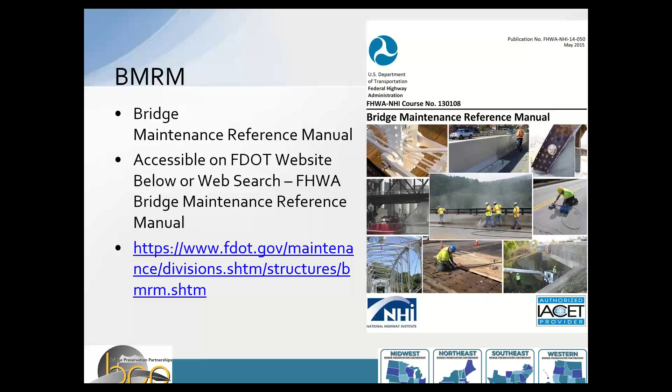So today we're talking about drift removal, and we're going to start off with what's the big deal with drift? How do I spot potential issues? We're going to talk about environmental and safety issues. We're going to talk about how to prioritize your drift removal, and then we're going to go into some best practices as well as proactive practices for removing your drift and sediment.

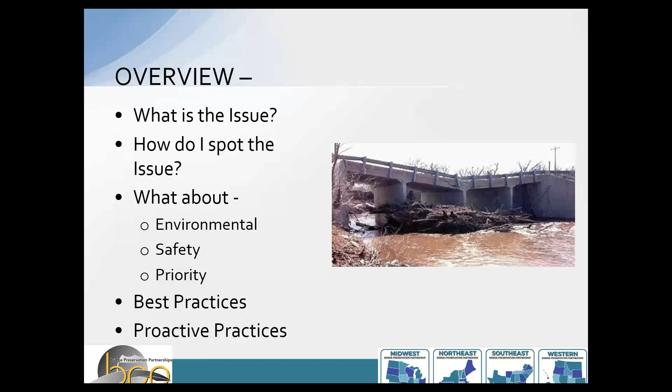So debris against a bridge can do several things to the stream and the bridge. Not only does it decrease the hydraulic capacity underneath the bridge, but it also increases velocity. That increased velocity of the stream increases the sediment transport, which increases the scour potential. As well as in some extreme cases, like in this view here, it could increase lateral pressure on the bridge that it may or may not have even been designed for.

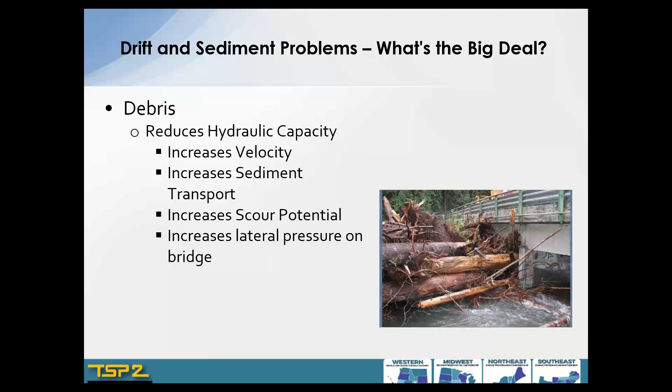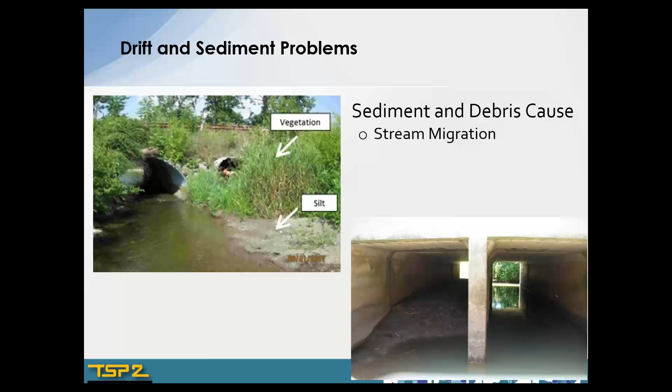Isn't it? There we go.

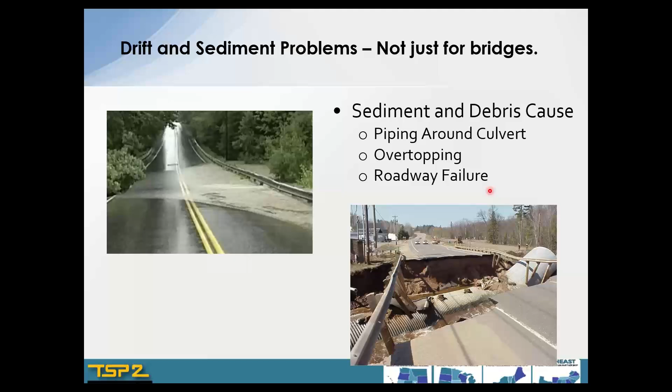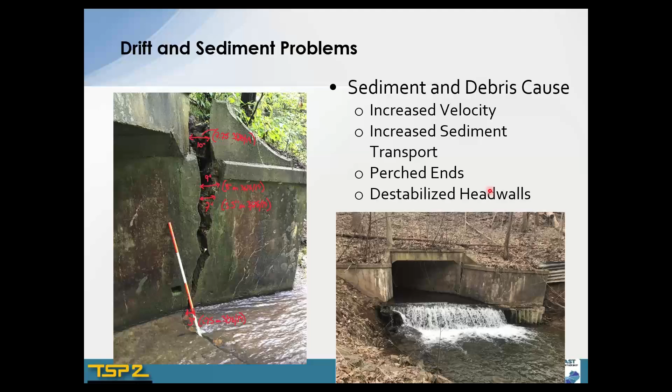Some problems are not so obvious. Sometimes if you're walking down a slope to look at the end of a culvert, you might see some holes in the slope. This isn't necessarily an animal hole. If it's directly over the culvert, stick a probe in there, see how deep it is. It's probably caused from some kind of ingress of soil from above into your culvert, where there might have been some settlement due to scouring issues that opened up seams and joints that the dirt can get through now, and you're starting to see that problem up on the slope.

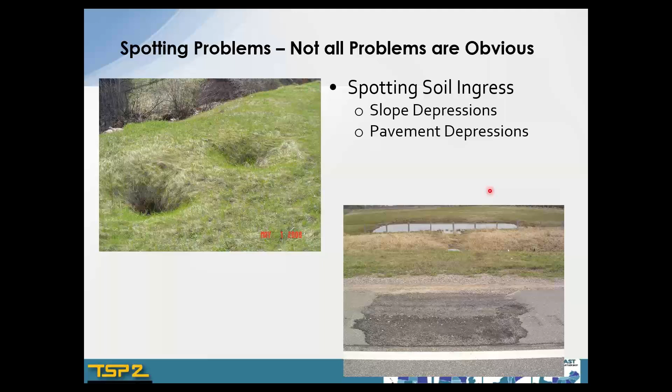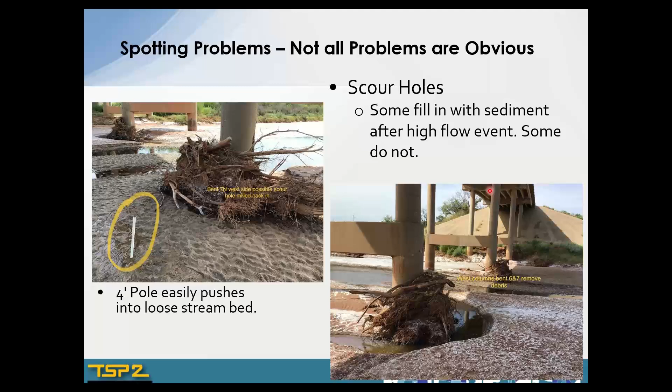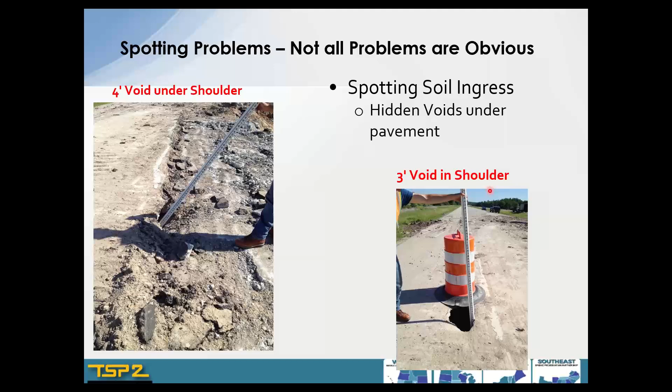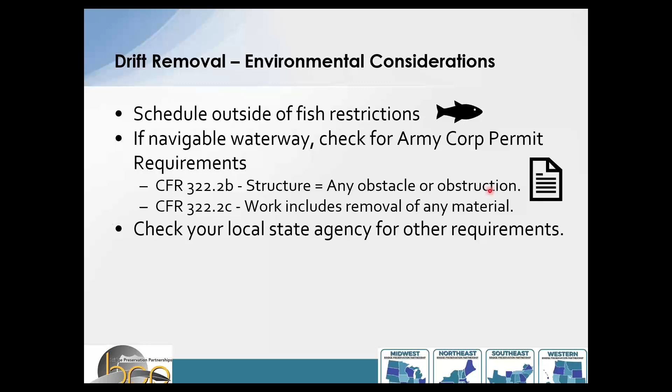If it's a navigable waterway you need to remove drift from, you're going to have to check with the Army Corps if they're going to require a permit to remove that drift. The language in the CFR is kind of very loose and ambiguous. They define a structure. The definition of structure includes any obstacle or obstruction, which drift qualifies for, and they define working in the water. That definition includes the removal of, and it just says any material. So obviously, Army Corps will need to be consulted on navigable waterways, but the biggest recommendation is always going to be to check your local state agency for other requirements.

So I looked into Michigan DEQ. They're very sensitive to fishing and fish habitats, and anything that could possibly disturb the river bottom. So if your drift is wedged into the river bottom, that's going to disturb the river bottom. And also drift makes great fish habitat. So you're going to need a permit for any removals in Michigan.

Oregon, I guess, has a removal fill law that says that more than 50 cubic yards of debris that's removed requires a permit, or if you're working in a salmon habitat. Looked at Kentucky. Kentucky has no permit needed to remove drift if you're following their best practice document, which has things like not disturbing too much of the banks, accessing responsibly, not driving equipment into the river, and so on and so forth.

Yeah, Jason, I'll just add on to that. In Oregon, it's highly encouraged from the environmental perspective to cut and float the drift down to your neighbor's bridge. I say that facetiously, but that really is what the desire is, to send it downstream and hope it doesn't get hung up on your next one. Yeah, I think one of the Kentucky best practices I looked at included cut and turn, which we'll have a slide on later.

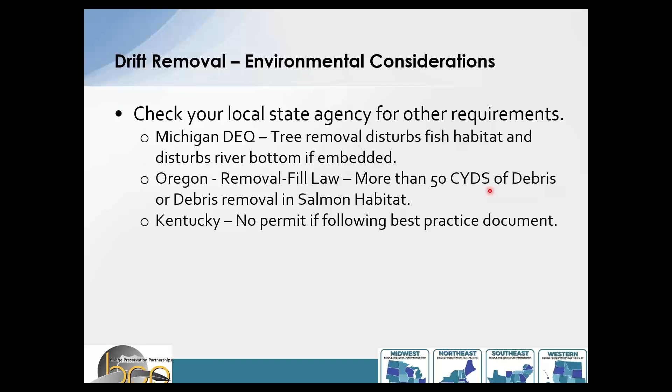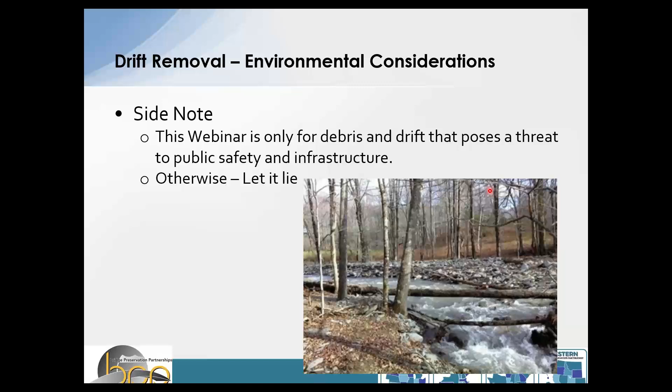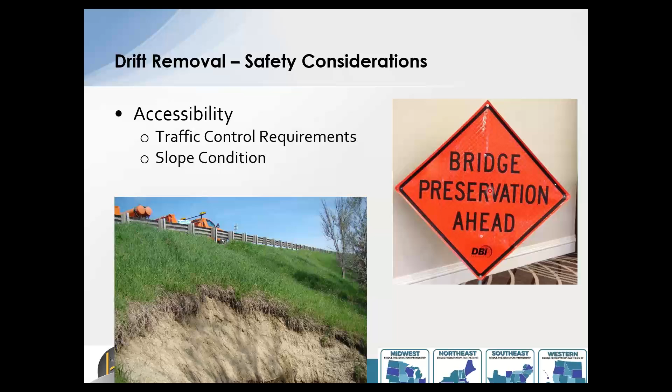Accessibility considerations: you're going to want to look at what your traffic control requirements are for the bridge or the culvert where you're doing this work. Is the traffic control going to have to be day or night? Let those things inform your decisions on what kind of safety requirements and safety equipment you need out there. If you need to go down the slope to access the drift, you're going to want to look at the condition of the slope, see if it actually is accessible, if there's an accessible point where you can get into the stream to the drift.

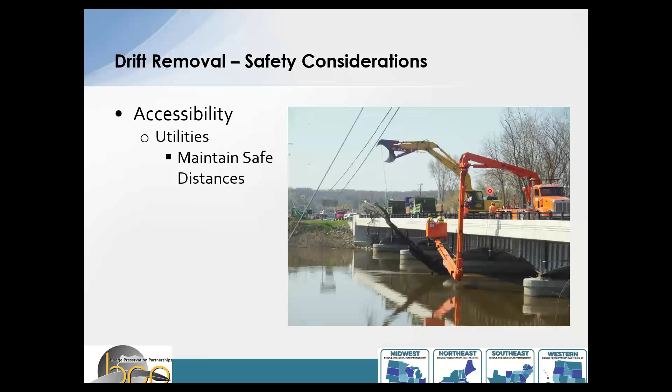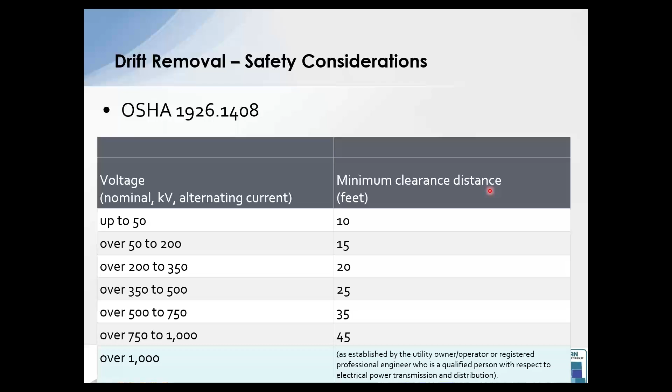So how do you decide which bridges you should look at first for drift removal? First, we're going to talk about, is your bridge scour critical or not? If it's not scour critical, it's not as high a priority. If it is scour critical, you should consider the removal of drift a high priority for yourself.

Everyone should have the scour criticality of their bridge flagged in the bridge file. It's metric number 18. It's required by the Federal Highway Administration to have your bridge evaluated for scour vulnerability. And if it is listed as scour critical, or if it's determined to be scour critical, you need to have a plan of action. Going to show some samples of what some of the plans of action look like from Michigan DOT and the information that we provide.

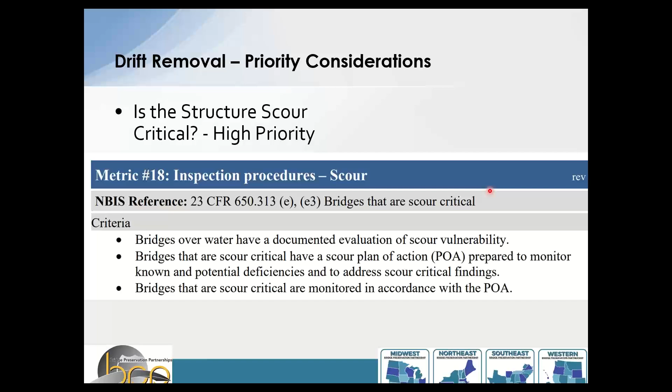So some of the information is helpful to also help with determining whether or not you should prioritize your drift removal. So you can see here, this bridge here, they have a scour analysis done for the 100-year and the 500-year flood, showing between 1.5 to 4 feet of freeboard, depending on the flood event that they had.

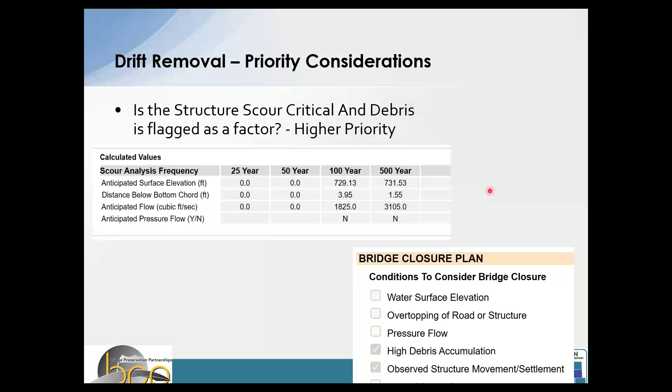There's also in the scour action plan, items to consider for bridge closure. So if you have high debris accumulation during a flood event, this bridge should be closed until the event is over. So if your bridge is flagged as having to be closed if there's high debris during a flood event, then you might want to make sure the debris piles are out of there before the high flood event. This is probably the higher priority in the inventory to make sure you get to for debris.

This bridge also experiences pressure flow, so it already has a hydraulic capacity issue flagged in the scour action plan. So it's very susceptible to scour under pressure flow, and high debris accumulation reduces that hydraulic opening, further worsening the scour issue. You can see here, even at the 50-year flood, this is flagged as having 0 freeboard. So that's not a very big flood recurrence.

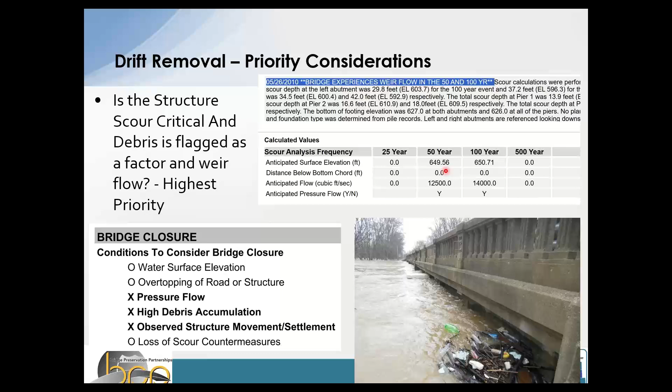Another highest priority, I would say, is if you have a scour critical bridge that has an existing foundation issue. Up here in the upper right, this is one of those sneaky scour holes that filled back in, but it projects well underneath the footing. In fact, some of the footing is even undermined. You can see the footing exposed here, and you can easily stick that range pole underneath the footing.

Over here, this is an issue on the bottom left here. I see a pile there, but guess what? A pile doesn't mean that it's scour stable. Some of these old timber piles were purely there for construction purposes without scour in mind. Additionally, in this situation, you can already see that there's soil coming out from underneath the abutment, and that can start to lose your approach. So if there's debris that starts piling up here, that's going to be a high concern.

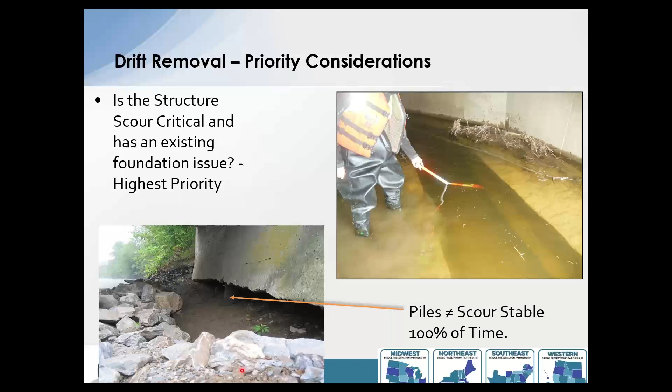So other considerations, the USGS has a lot of stream gauge monitors, and you can actually go in and look at your individual bridge location and see what projected flows are and historical flows and when the high flows are throughout the year, without having to do a lot of legwork going out in the field to monitor yourself.

So you can actually go to that USGS site for your stream, try to figure out the best time of year to remove debris for the lowest water depth and lowest velocity of the water at the time, because that's desirable when you're out doing debris work.

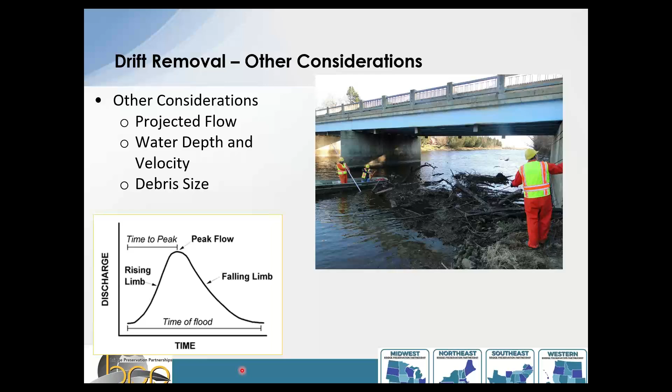So equipment. This is pulled from some of the best practices from that Kentucky document I was talking about. It says, do not drive heavy machinery into the stream. The goal for every state on every debris removal project would be to minimize your stream bottom disruption. You're also going to want to minimize the number of access points to the stream bank.

This Kentucky document recommends rubber tires on your equipment to reduce disturbance of soil over track-driven equipment, because the track-driven equipment obviously tears up more of the soil, and tearing up more of the soil on the adjacent stream banks will increase your future erosion. Additionally, try not to disturb the existing stream banks. Those are what holds the water in, and destabilizing them will cause future problems.

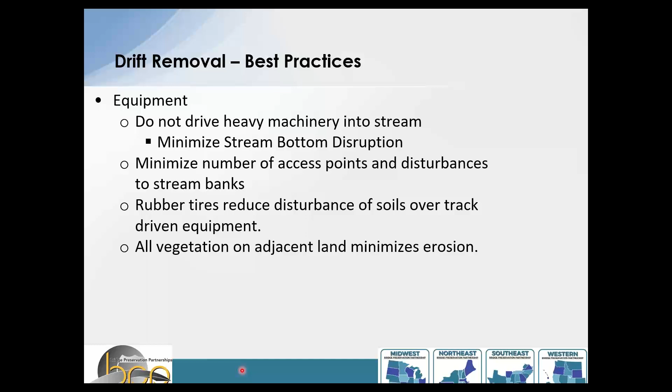Some more drift removal best practices here. In low flow streams with small pieces, you can wade in there, maybe take a chainsaw in there or some kind of hook where you just kind of grab it and turn it and let it float down. Hopefully it doesn't float down to the next bridge. Hopefully it floats off to the side and gets hung up on the bank and sets in there and makes some more fish habitat for you.

So you can see on the right here, these guys are using what looks like some kind of grappling hook to lasso down below the bridge to try and break loose some of the debris.

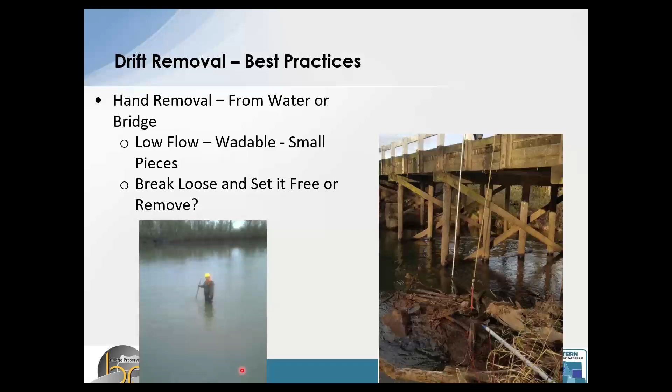Really large debris like this, you're probably going to want to haul away. At a minimum, if you're just going to leave it, you're going to want to place that drift above the ordinary high water mark, or in this case here in this picture, remove it completely from the job site for something that big. I mean, you could try and set it free and do a cut, turn, and float like Travis indicated. Just got to kind of figure that out, how well that'd float in a low stream event here.

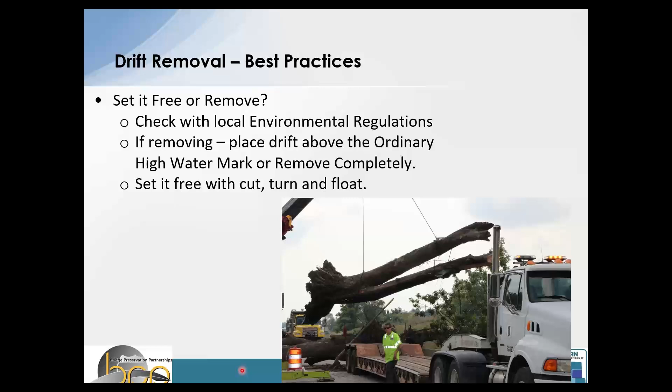You can also, Michigan DOT, I pulled this from their spec book. You can run it through a wood chipper before hauling it away and then dispose of it, just to kind of make it more reasonable and not need a giant flatbed truck to get it out of there. You know, cut it up into smaller pieces, manageable on site.

You can also just burn it, build a big bonfire. But there's a warning against using hazardous material as a kindling. I'm sure they don't have the warning in there because no one ever did it. They have the warning there because people used to try and do that. So don't use plastics, tires, fuel oils to set your wood on fire. And this goes without saying, but I'll say it anyways, get it clear from the bridge before you light it up.

Yeah, don't start the fire under the bridge. Unless you're really trying to get rid of that bridge. Yeah.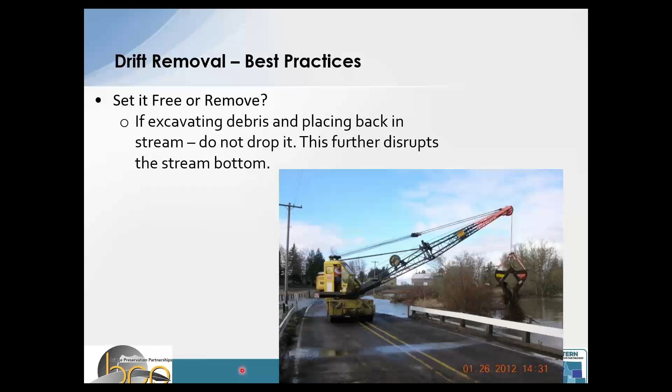Equipment: if you're using a chainsaw above the water or under the water, make sure you're using environmentally friendly lubricants. And, you know, this is the time to innovate with your equipment too. I talked to my Indiana DOT counterpart when I was at Michigan DOT, and he was hiring these large vehicle wreckers to come out with the bridge crews and help them crane out some of the bigger log jams.

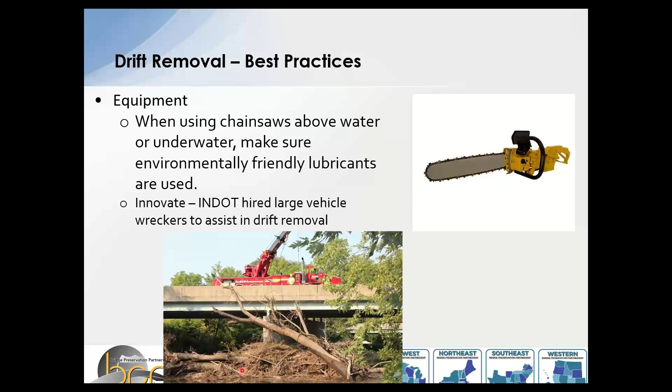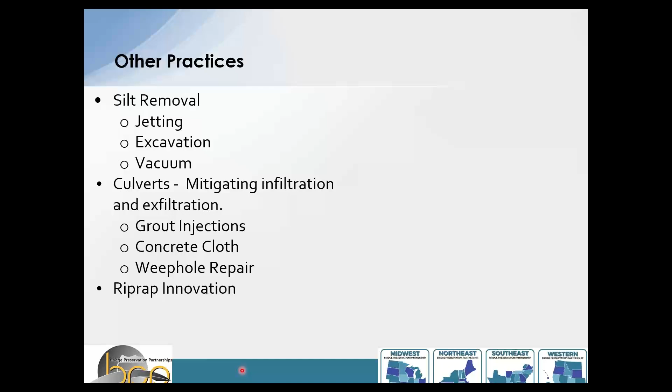So we're going to cover some other practices, kind of focused on culverts here because everyone has lots of culverts compared to their bridge inventory. And they're just as important because culvert failures also cause road failures. So we've got flushing here. If you're going to use a fire hose or a fire hydrant nearby that you're lucky enough to have for your water source, make sure you reach out to your fire department and see what they have for requirements. Our flushing crew that I managed, as a practice, we had these backflow preventers we put on the fire hydrant before connecting our water lines to them.

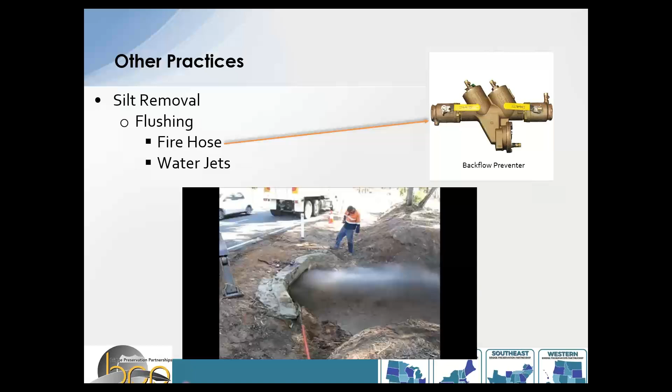Here's just a little video showing this culvert being jetted out. So it's going to pan to the right and you're going to see they've got some kind of protection there so the sediment doesn't necessarily go downstream. As they're jetting it out, they can remove it properly.

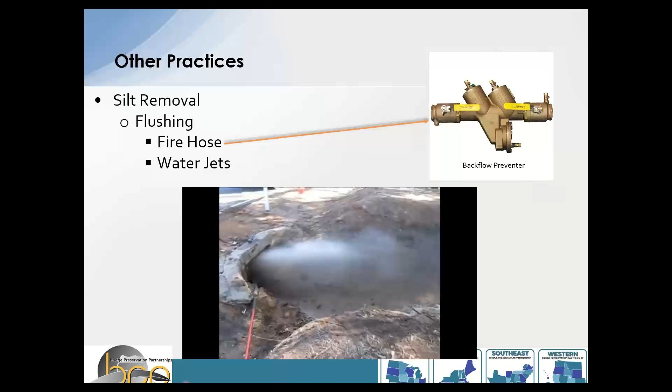Here's an example of a culvert on the left that was completely sedimented in. Can barely see any of the return walls or the side walls. If it was panned out a little bit, you can kind of see up here that the slope was starting to fail as it's getting undermined by the water not being able to access the culvert. The water's going to find a way no matter what. So what they did is they came in, cleaned it all out. You can see all the return walls again. They kind of riprapped where the bank used to be before it got sedimented in and jammed with debris. They've got their silt fence out to make sure that they don't spread anything. So this is all nice and cleaned out now.

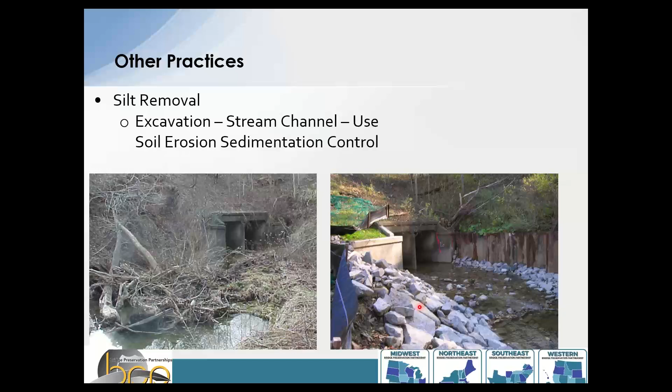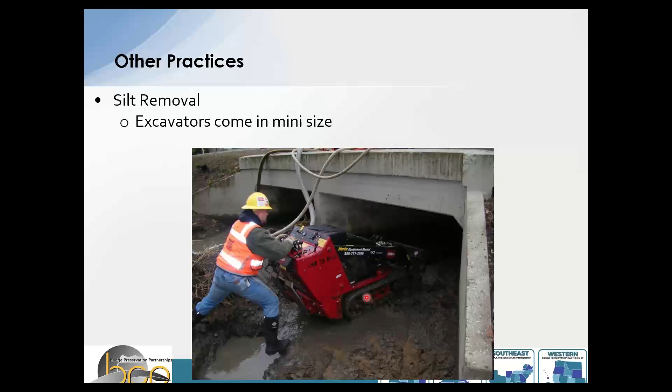Excavators come in mini size. So don't be afraid to go use a miniature excavator. Here's an example of an operated mini excavator. Next, I'm going to show a video of this triple box culvert being cleaned out with an actual excavator that's so small it's remote control.

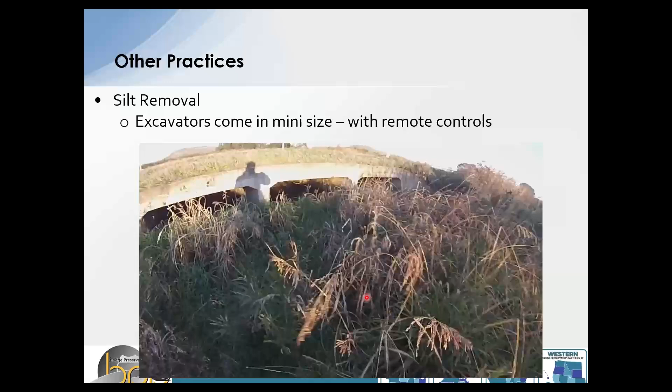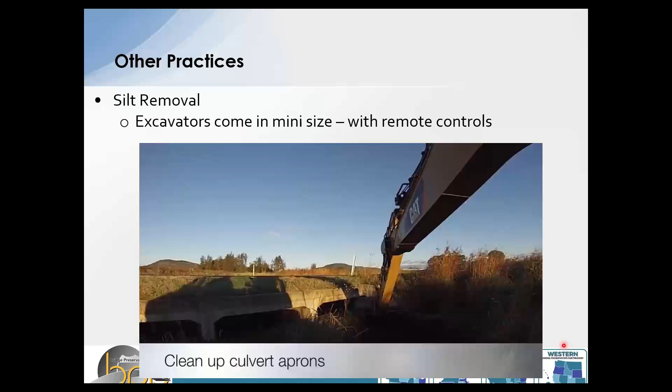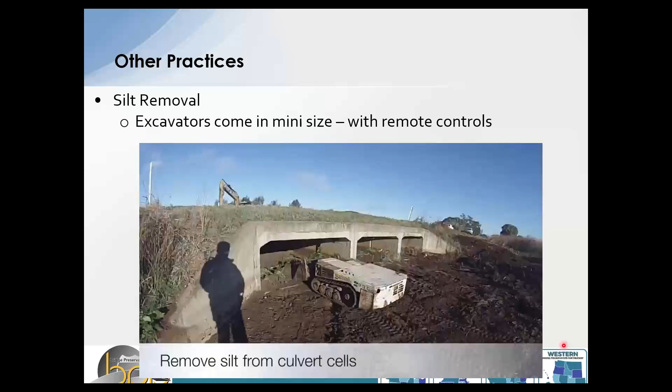Here comes the remote control. I love this video. I mean, I would have loved to have been the operator of this. It reminds me of my childhood sandbox. Been so fun.

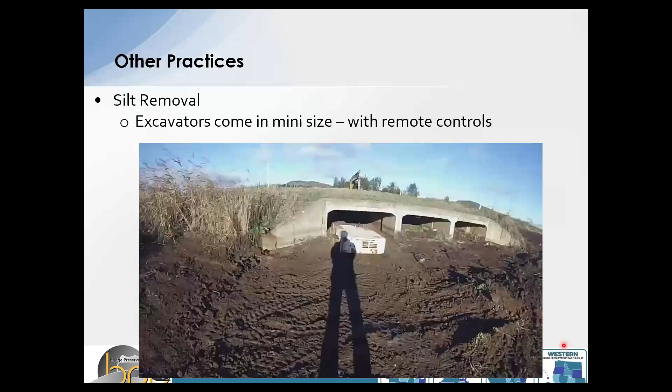So, as the video's playing, Jason, do you have any suggestions on how to prevent it from silting in again in the future? I mean, I think it's just a natural thing that happens. But at the same time, I'm guessing it's never had the silt removed. This culvert could be 50 years old and never had anyone think about removing the silt. So if it just gets on some kind of... I mean, this is big enough to be considered a bridge. So yeah, you should have maintenance recommendations for something like this.

Yeah, the only thing I've seen folks try in some situations is improve the hydraulic velocity by kind of channelizing a meandering stream a little bit to increase the flow to try and keep it from silting. That definitely takes a permit because you're not allowed to necessarily straighten out meandering streams all the time. Right. As much as we'd like to.

So, yeah, this is probably just some kind of drainage ditch between two farm fields is my guess. And the water probably doesn't have a lot of flow, so it's just going to naturally silt in over time. So here it is, all cleaned out and nice now.

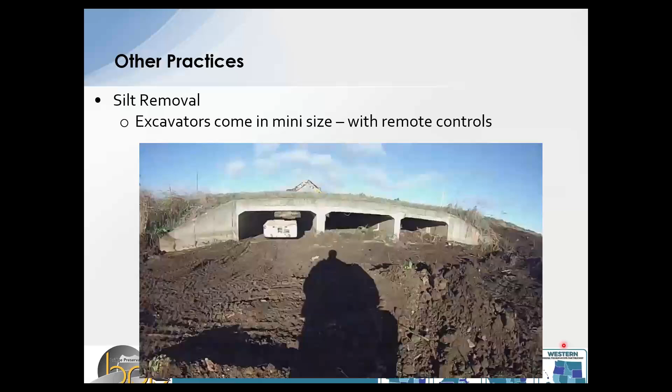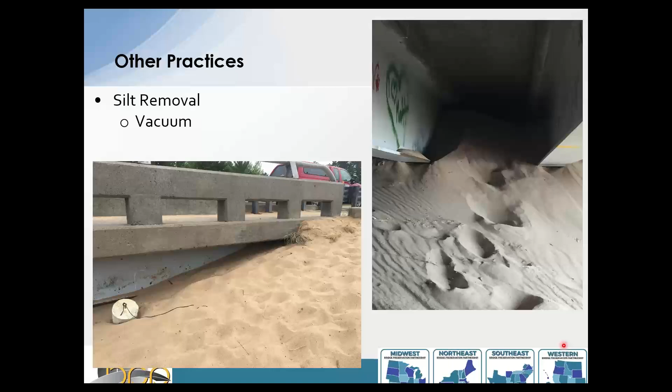If the lighting was a little better, the sand is actually packed in all the way to the deck bottom. So it was really packed in there, and you can't inspect the beam ends or the abutment in its current condition. So we went in there with a vac truck, and we actually vacuum excavated out like four truckloads of dirt. Gravel haulers. So this picture was taken about 8 years after we removed the sand up there.

You can see it's starting to sand in again a little bit. There's nothing really to stop it. You just kind of make sure it doesn't get to that point again. You can see we got the abutment and the beam ends again can be inspected.

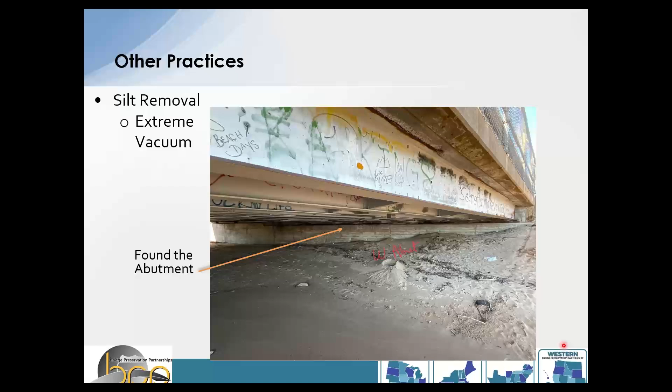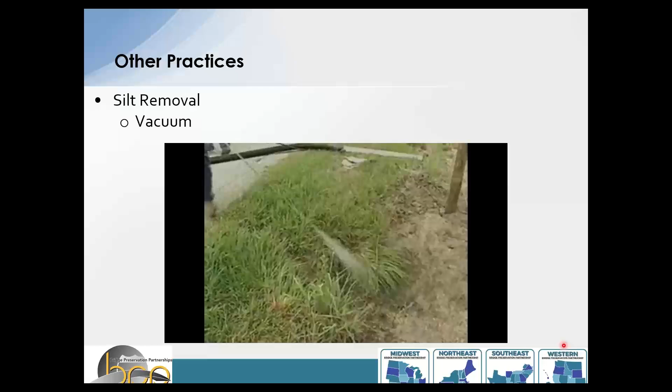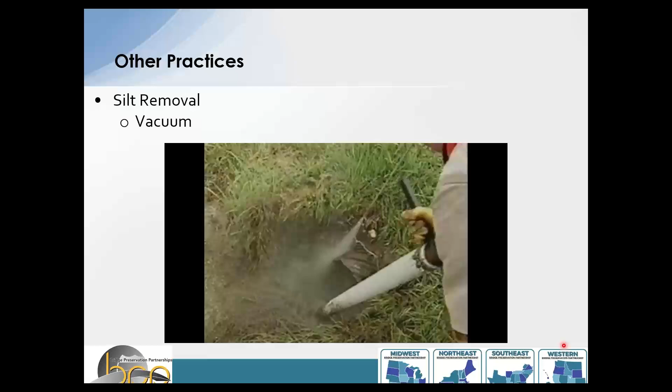So here's a video. This is a vacuum excavation where they're loosening up the dirt with water jets, uncovering the end of this culvert that had been lost. Yeah, it's impressive that they still knew there was a culvert there.

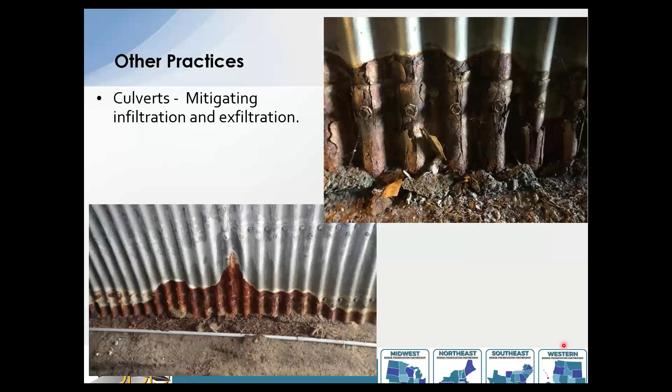The hammer went all the way through, and little did he know that there was a river of liquid sand behind. So that hole that all that dirt's coming out of is only the size of a hammerhead. So the bridge crew that was trying to fix this named it the Wendy's Frosty machine, because that's kind of what it looked like coming out.

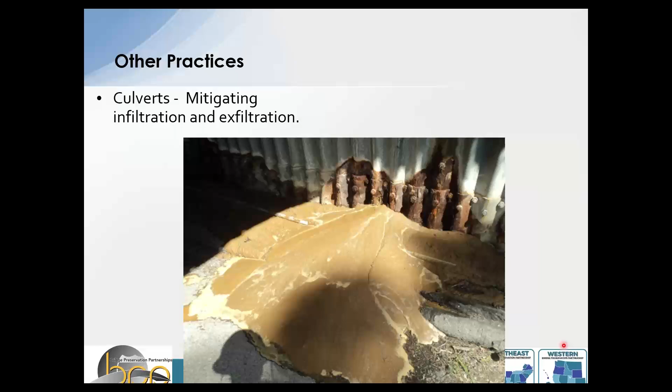Here's a way to mitigate some infiltration. You can do grout injections. You can see here the grout ports are installed, and they're not installed on top of the crack. What you do is you actually drill into the concrete at an angle and angle your port through the crack from away from it. So you'll drill in, and if anyone's done concrete drilling through a crack like this, you know you've gone deep enough and hit the crack because you can actually feel your concrete drill going through the crack.

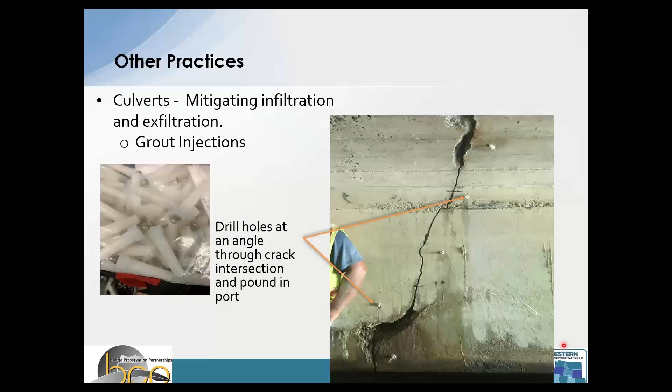Once you've got your ports installed, then you want to come back with a hydraulic cement, and you're going to want to hydraulic cement that crack so none of your grout that you're going to inject leaks out into your stream below.

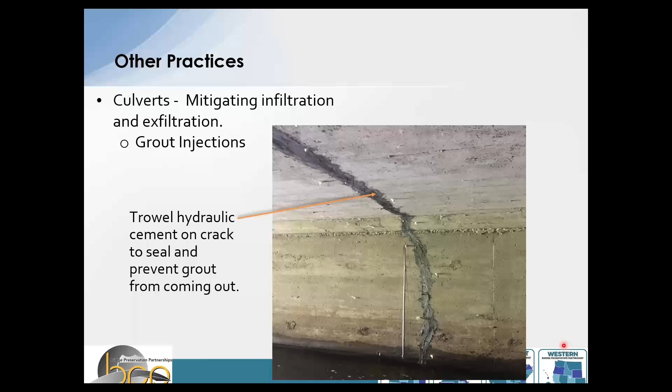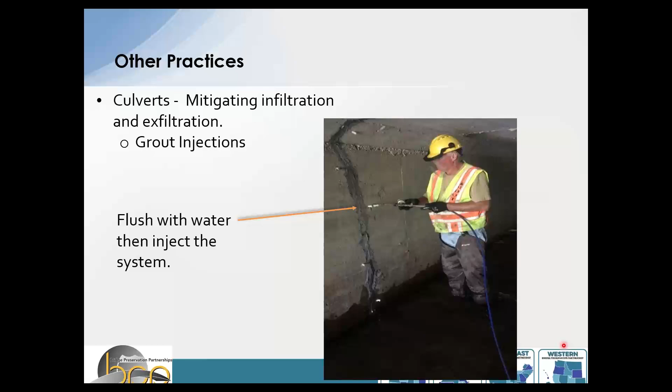Then once you get the hydraulic cement's all cured and set, you can come back. You're going to first flush everything with water. That's going to start pouring out of your ports, and then you're going to inject your grout.

If you suspect there's a lot of voids behind your culvert, you're going to want to use an expansive 2-part polyurethane grout. In Michigan, we like to use AzoGrout 551 for doing injection culverts when we suspect there's a lot of voids. Like I said earlier, you can kind of tell if there's voids behind your culvert based on the behavior of the road and the slope above.

Here's an example, though, of where you wouldn't use a hydraulic cement to seal your crack. If you have active water flowing out of the walls and cracks in your culvert, like pouring out, leaking out, dripping out, you're going to want to use a hydrophilic grout that activates in the presence of water. This AzoGrout 675 or the 443-C, it's actually called a water stop grout, so it'll actually react with the water and seal that joint up.

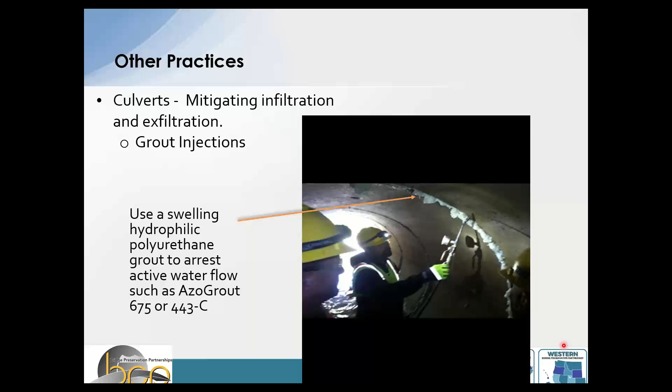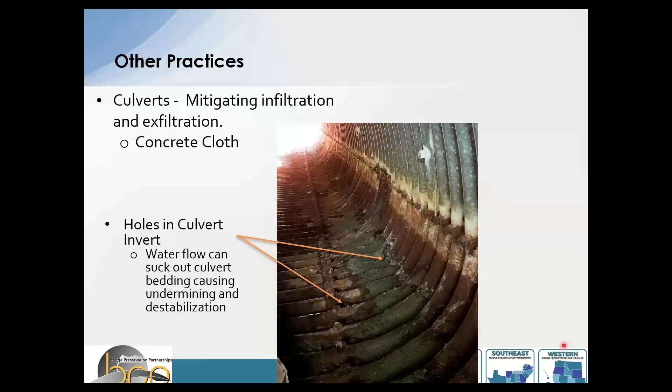Going back to these CMPs, the holes in the culvert bottom here, what can happen is during high flow events, it'll actually start sucking the soil out from the holes and sucking out your culvert bedding as the water goes over it. And that'll cause some undermining, destabilization of your culvert bottom. It'll even cause possibly some settlement, and that'll start pulling apart your culvert joints.

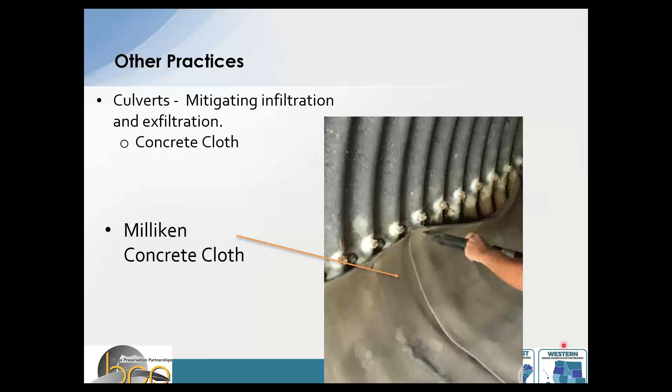In Michigan, we like to use this concrete cloth to mitigate culvert bottoms like this. The concrete cloth we use is from the Milliken Company. It's actually pretty versatile material. You can use it to stabilize drainage ditches. You can use it to stabilize failing roadway slopes. It's pretty easy to install.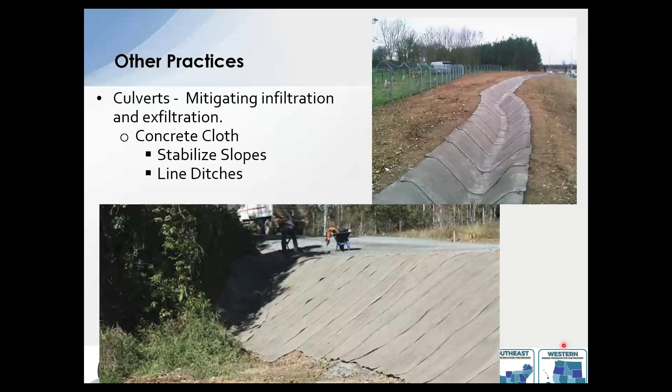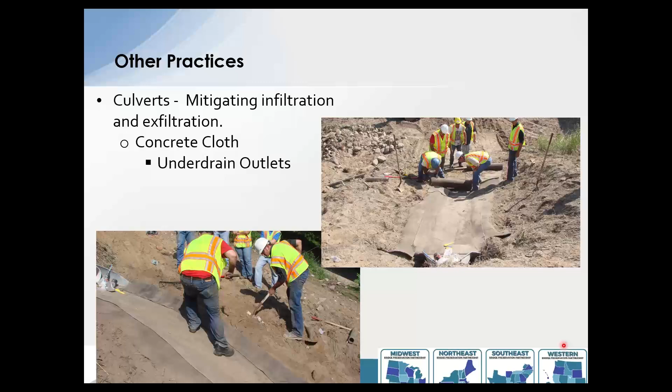It's basically a hydraulic cement impregnated fabric that you can just roll out, staple it down, or anchor it down to a slope, anchor it to your culvert, and then you just wet it. That's all you got to do, and then it sets up like a concrete. Here's that culvert that had the holes in the bottom. It's got the concrete cloth all established from one end to the other, and like Travis said, something like this will end up reducing the friction of the bottom and increasing velocity.

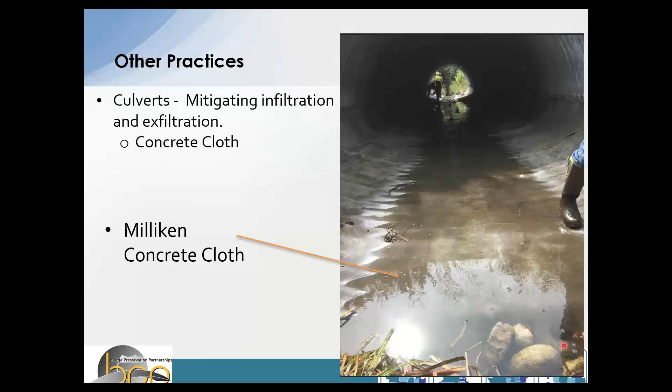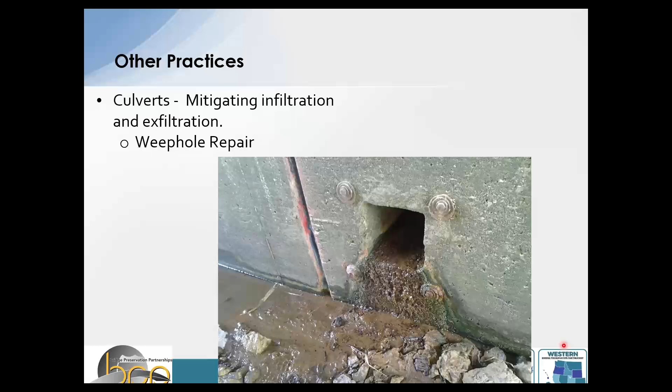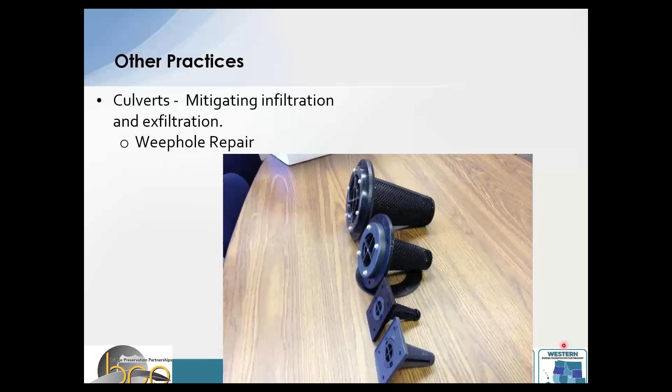Another thing we like to do is in Michigan a lot of our box culverts have these weep holes, and they're just not meant to be there forever. They don't work effectively, and they let in a lot of sediment from behind the weep hole. As covered previously, the sediment infiltration causes problems above. This company in Michigan decided they were going to fix weep holes. It's called Jet Filter. So they made this maintainable weep hole. You just get it sized to match your weep hole that you have on your bridge. You can stuff it in there.

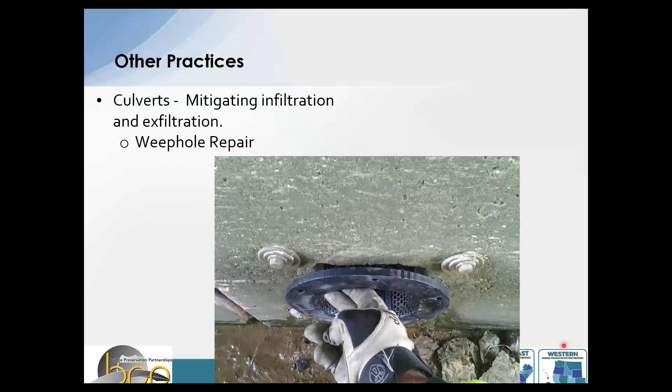You can see in this picture there's a big flange. So the outer ring of bolts are anchored into the concrete of your box culvert, and then the inner ring of bolts, that's the actual jet filter, the weep hole maintainable drain. So you can unscrew it, you can maintain it, you can clean it out, and then screw it back in every so often if you want. But it does filter out all of the soil, so you don't have that infiltration into your culvert anymore.

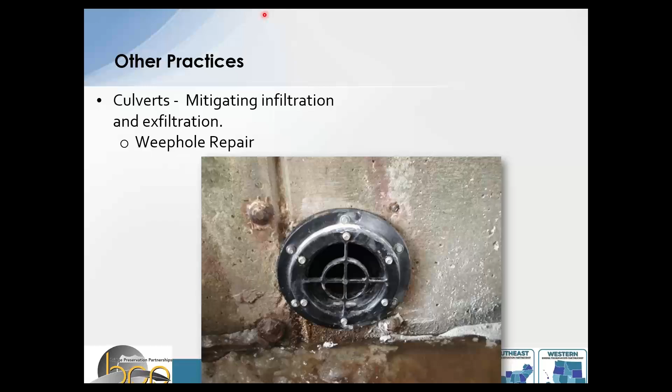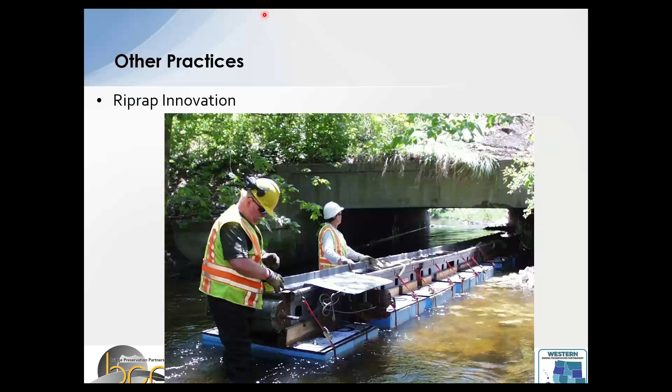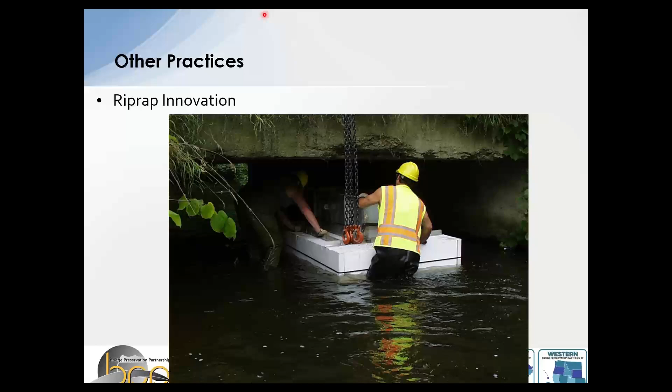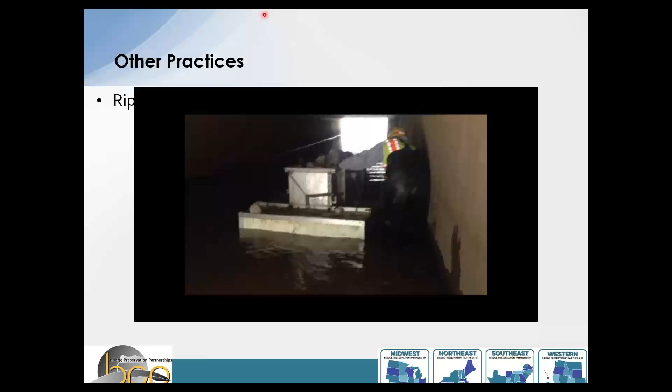Not to be outdone, our bridge crew that operates in the thumb is like, well, we can outdo that. And so they made their own float box pontoon boat riprap dispenser. I'll show you a video of that in operation. So they fill up this box with riprap. They can float it into the culvert and place it right above their scour hole. You're going to see here he's going to pull a lever and it's going to drop all of it right where he wants it.

Wow, that's really slick.

One thing I would mention on those last couple slides is that if you get a hold of a hydraulic engineer, they may suggest that you need much larger rock for it to be considered an engineered scour repair. But one of the things that I like to promote is maintainable scour countermeasures, right? You've certainly improved the condition that was there. Yes, if you have a huge storm event, it may wash out, but it bought you some time during that storm event, and you can go back in and do it again.

So I've always been an advocate. Of course, I'm not a hydraulic engineer, but an advocate for do what you can. If you can't get jetty rock under the bridge, well, then maybe you get in something smaller. Yeah. They're just out there fixing problems, and I like it. Yeah. If you ask a hydraulic engineer in the state of Michigan, they're going to tell you that there's no riprap big enough to mitigate scour.

Yeah. Hopefully we don't have too many hydraulic engineers on the line. We appreciate you. Yeah, I appreciate the hydraulic engineers.

But we have limitations sometimes on what we can place. And I've worked with some great ones where I just said, hey, look, I just can't get that rock in there. Like, either we do nothing or we do something. Do something. So that's what a lot of times it comes down to. It's either do nothing or do something. And do something, like you said, is much better. With that, I'm going to turn this slide over to Travis.

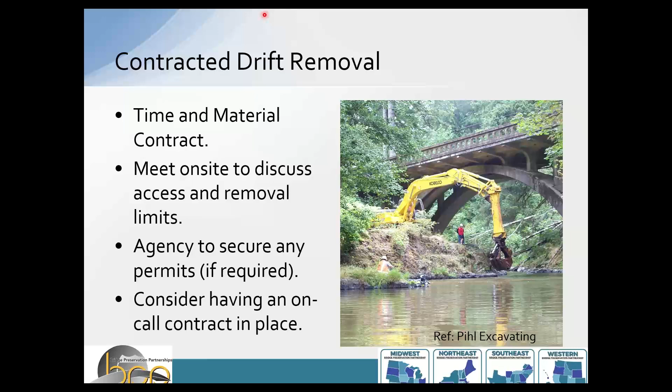So with that, Jason, if you want to advance us to the question slide. I've been answering most of the questions as we go, but there's a few that are worth a longer discussion. The first one that I flagged is how to prevent drift in the first place. Are there things you can do in design or in maintenance so you don't have these problems?

Prevent drift? Yeah, I don't think that's possible. So I did throw out some suggestions. Modern bridge design: if any bridge gets replaced these days, best practice is to put them on piles to a depth that they're not scour critical. Avoid piers in the water as much as you can, which is also going to be incorporated in current bridge design anyways. And if you do have to do it, limit the number of columns and the number of piers to the greatest extent possible.

In Michigan, we did bridges in the water with solid piers, so you don't have that column to get hung up on. You can still get jammed up on the nose at the front of it, but you're not going to have all the snags in between with the columns. Yep. For timber piles, we've also seen where we've installed a bunch of fenders around the piles, boarded it up to turn it into a giant wall.